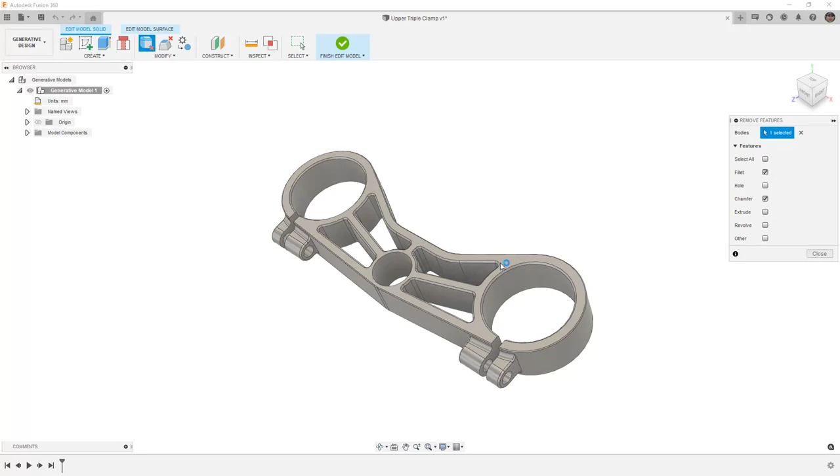We're going to do this by first going into Edit Model, selecting Modify, and Remove Features. We want to look for fillets and chamfers on this body by selecting it and taking a look at all the fillets and chamfers that are going to be removed. We're going to select Delete, and then Close.

Next, we're going to use Direct Modeling Tools. We're going to select the inside face of this relief and then press Delete on the keyboard. We're going to do the same thing on the other side by rotating around, selecting that same face and pressing Delete on the keyboard. Now that we've simplified the model, we can begin creating our preserve and obstacle geometries.

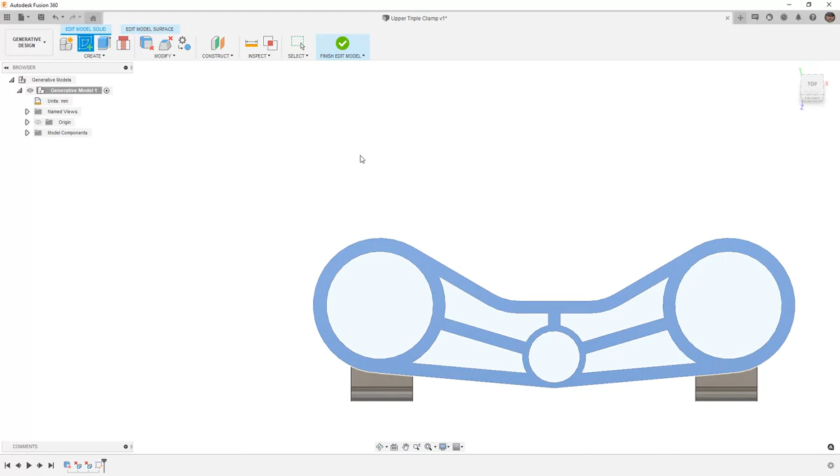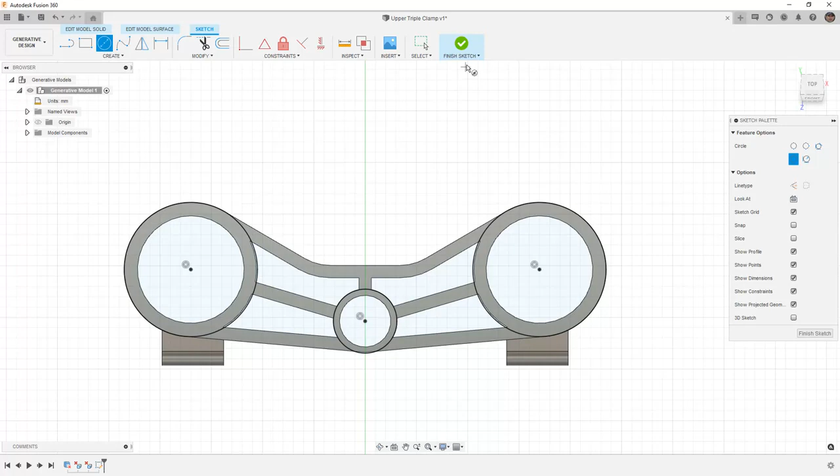We'll start by creating a sketch on the top face of the triple clamp. This will automatically bring in the profile that we selected, but we need to use some additional sketches. We're going to create a center diameter circle and snap it to some of the geometry, in this case 65 millimeters. We'll do the same thing on the other side, and then we'll repeat the process, getting all three of these cylindrical faces. We'll finish the sketch and create an extrude.

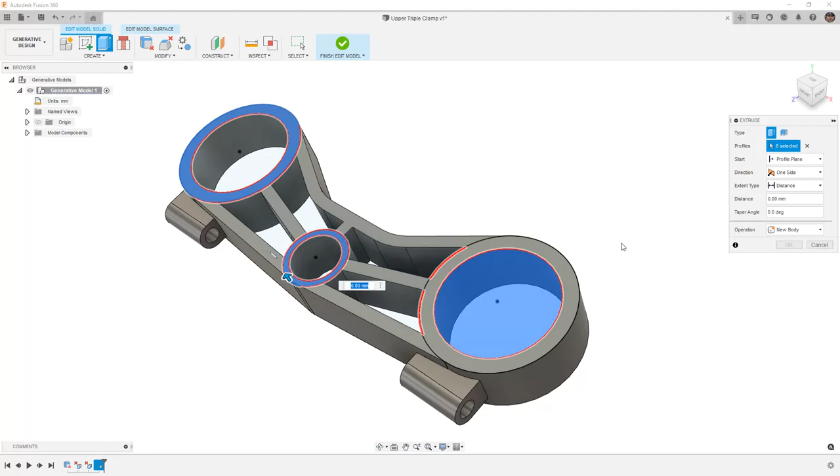It's important to make sure that we select all the areas, as there are a couple small areas that have these reliefs on them. We want to make sure that we select all of those. We also want to make sure that we select all the areas of interest for the center point. Once we have everything selected, we can go ahead and extrude this down. We're going to make it 25 millimeters and we're going to use New Body.

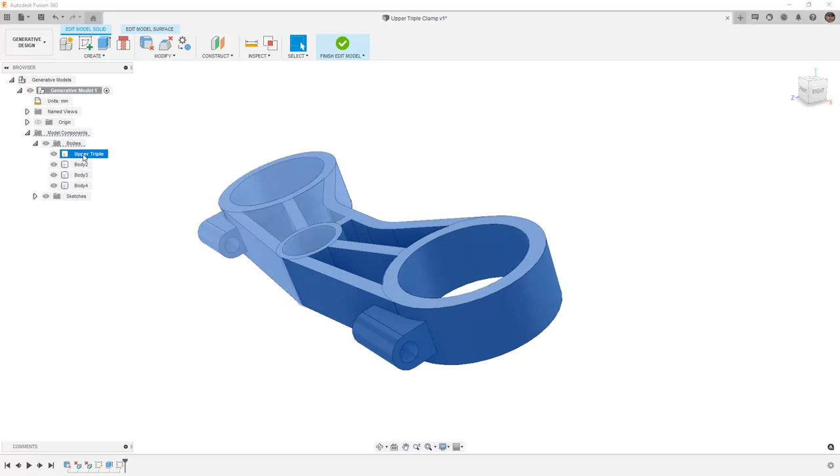Before we remove the original, let's select this face here, right click and create a sketch. We can finish the sketch, and then we can expand our model components, our bodies, select the upper triple clamp, right-click, and remove. Once again, we'll use Extrude, taking this sketch profile. We're going to extrude at a distance of 20 millimeters, creating a new body.

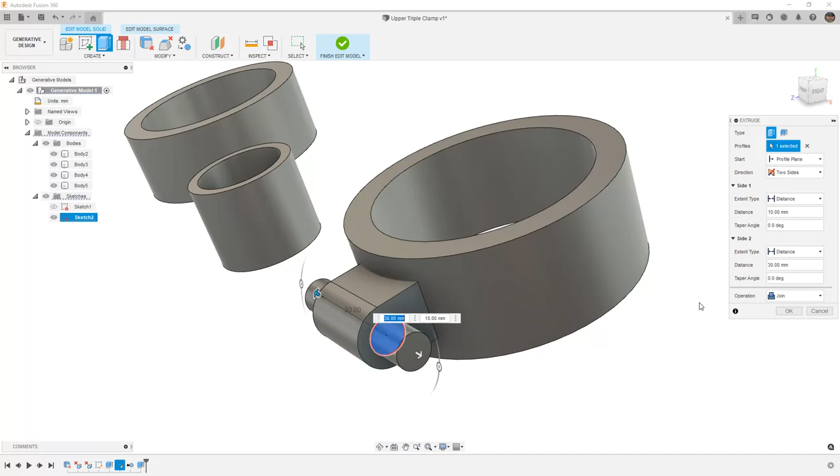We also want to reuse that sketch, and we're going to go Create, Extrude, and we're going to begin creating an obstacle. This is going to use two sides and just make sure that it extends all the way through, creating a new body once again.

Next, we want to use Sketch 1 once more, and we're going to use Extrude, selecting all three of the center portions, dragging them up a distance of 20 millimeters, setting it to two sides, and dragging them down a distance of 55, creating new bodies.

We can hide all the sketches, go to Create, and select Mirror. Now we want to make sure that we are mirroring bodies, and we're going to mirror the small bolt and the obstacle. We're going to mirror these across the default YZ plane, and we'll say OK.

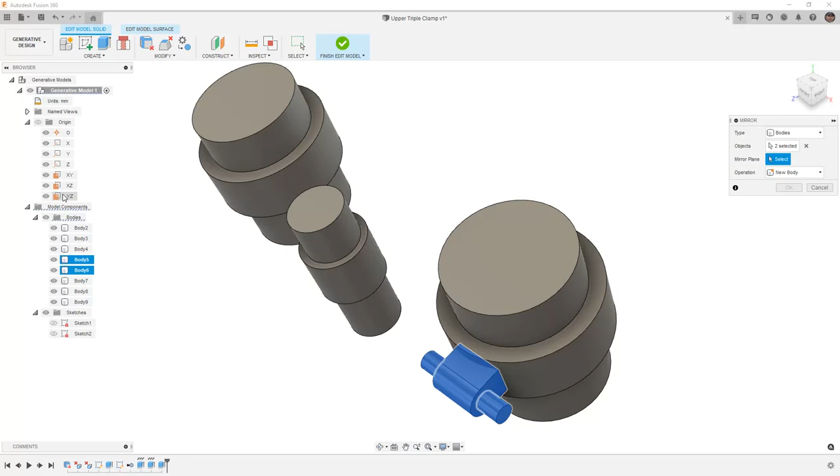Next, we can use Modify and Combine to join those small clamp areas to the outside of the right fork clamp, and we'll repeat the process on the left side as well. There are more obstacles that we can create, but this is a great starting point.

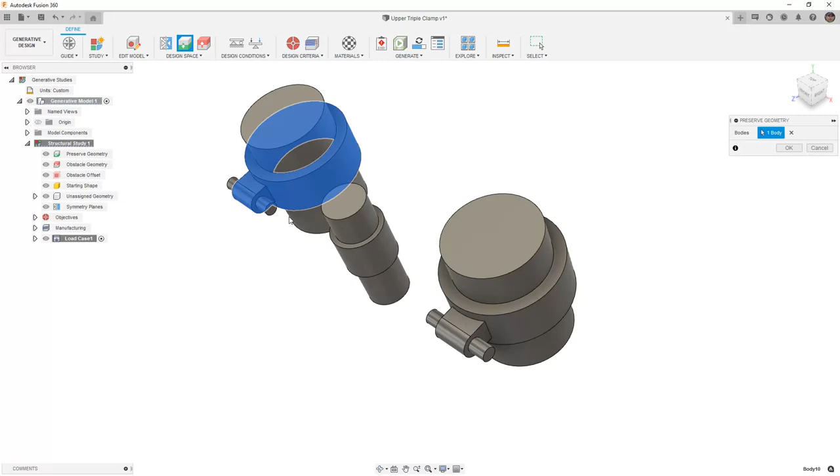So let's go back and select our preserve geometry. And then we'll select our obstacle geometry.

Now we have a starting point for defining a generative study for a motorcycle triple clamp. Let's make sure that we do save this design before moving on.